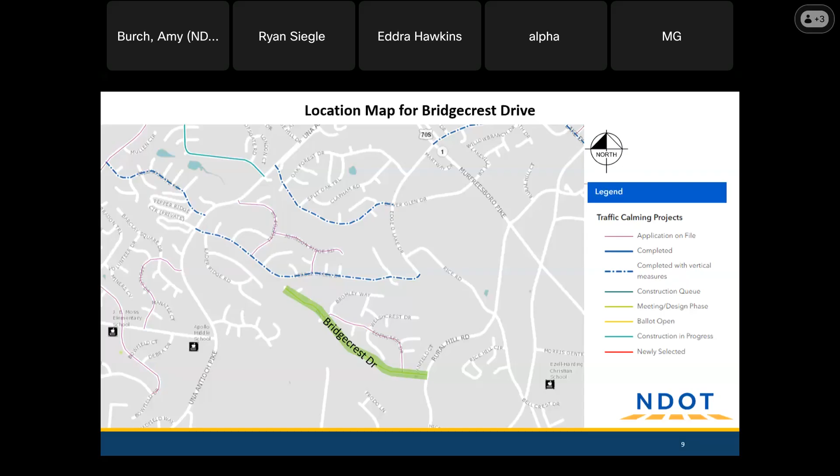Okay, so now I'm going to talk briefly about some of the tools in our toolkit. Speed cushions are our primary tool that we use, for a number of reasons, but they're very effective. People like them, they're easy to install. And for those reasons, NDOT really likes to use these speed cushions.

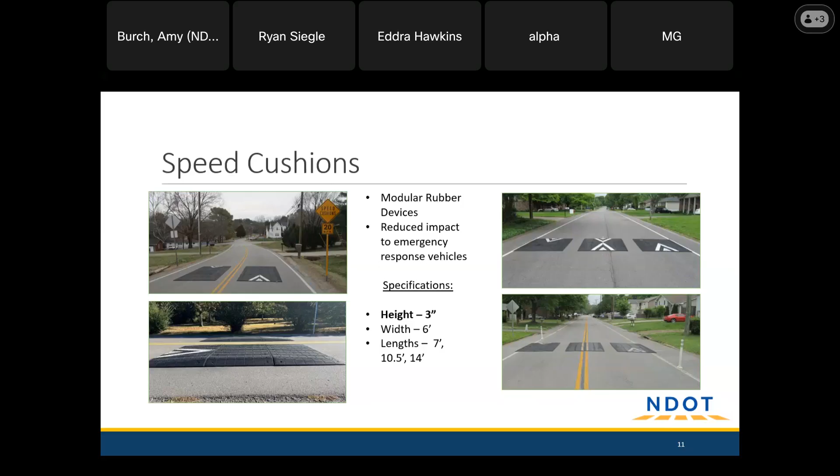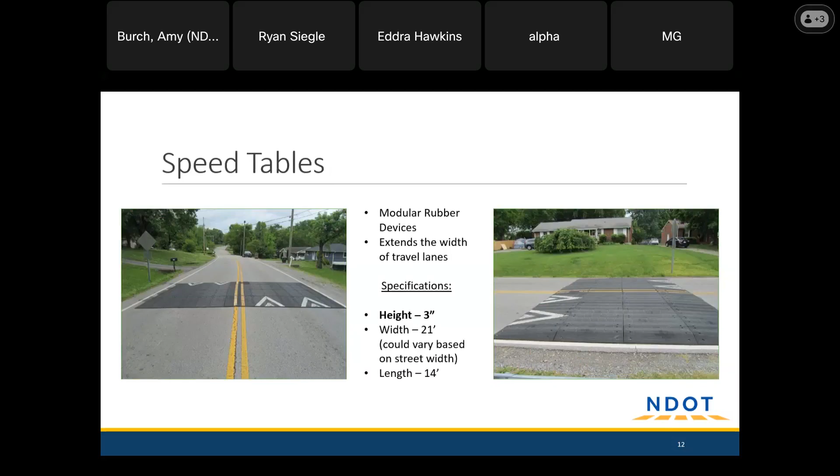Speed tables are another vertical device. They're made of the same rubberized modular material, but the difference is they don't have the gaps for larger emergency vehicles to straddle - they go all the way across the street, and they're kind of flat on top in the middle. Otherwise, the way you drive over them and their effectiveness is very similar.

We want to show some data points that NDOT has collected for before and after these measures being installed. The graph on the left is the average speed comparison - before, on the far left, it was 31 miles per hour on a street before the install, and the after average speed went down to 22 miles per hour. We measure this data between sets of cushions, so we're not talking about right at the cushion, but trying to make sure we're getting consistent speed along the street.

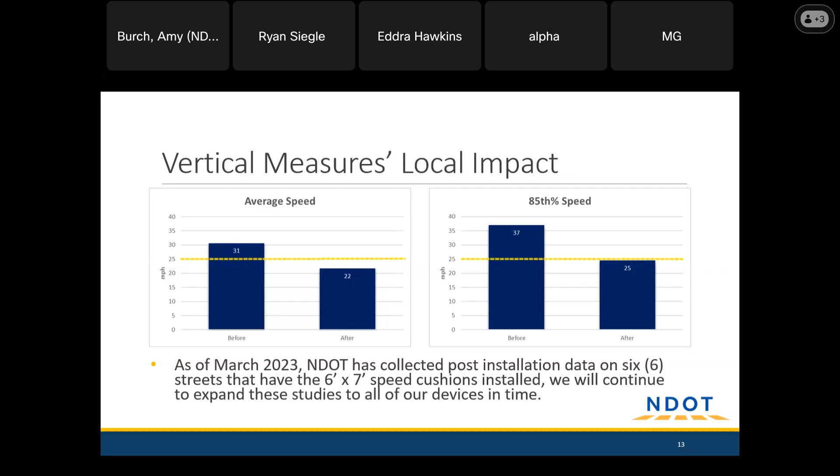The 85th percentile speed is the graph on your right, and that says the 85th percentile speed was 37 miles per hour before the speed cushions were installed, and it went down to 25 miles per hour after installation. So we're seeing it's pretty effective, reaching that target speed of 25 miles per hour, which is the posted speed limit. This is a study of 6 different streets we did a before and after study on, to make sure we were headed down the right track as we continue to install these on residential streets.

Another tool in our toolbox, you've probably seen these on streets around your neighborhood - the radar feedback signs. They are typically posted with speed limit signs, but will show your speed as you're approaching.

We also find these are effective, with the average speed reduction in our before-after study going down 6 miles per hour, and the 85th percentile speed going down 7 miles per hour. But these aren't installed in the road or anything, so it's more of a reminder for drivers, showing them their speed, because we sometimes don't pay attention to our speedometer as we're driving.

You had a question, sir? I had those posted on Bridgecrest last month, I think. On here, it says it collects the data, but online it said it did not. Did you have the speed trailer installed? Yes. So the speed trailer does not collect the data?

These do, and they can, that's how we're able to get some of this before-after data. It's a reminder to drivers, and those drivers that are conscientious really do pay attention to that and slow down some.

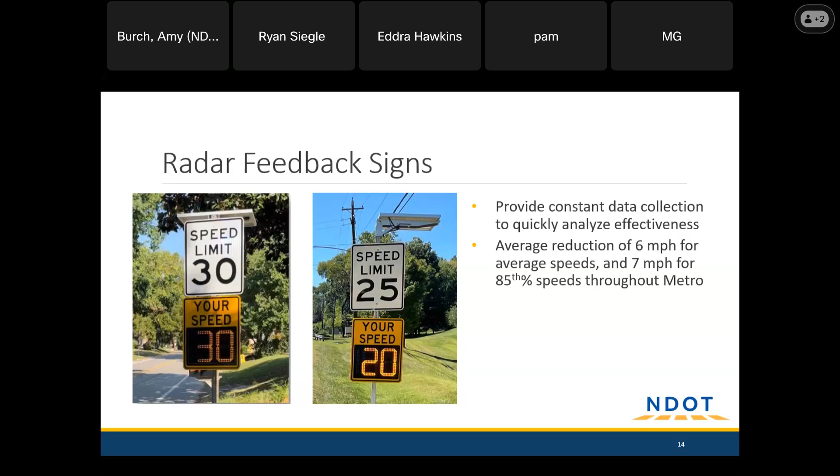Alright, moving on to some of our other tools that are not so physical in the roadway: pavement markings, lane narrowings, things like that. When we have a wide street that doesn't have curb, gutter, and all that, we can narrow the roadway. It gives a visual narrowness, and drivers can slow down a little bit with that.

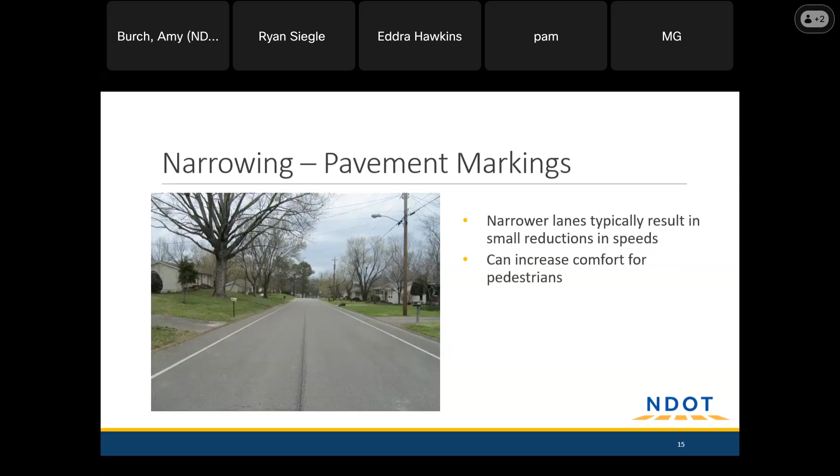At intersections we sometimes incorporate bulb-outs, using paint and white flexible delineator posts about hip height to narrow the intersection. This achieves slower turning movements through the intersection, and it narrows the crossing distance for pedestrians. So the one on the left is just a really wide intersection with huge radii, and we want to tighten that intersection and make drivers feel more constrained and make slower turning movements.

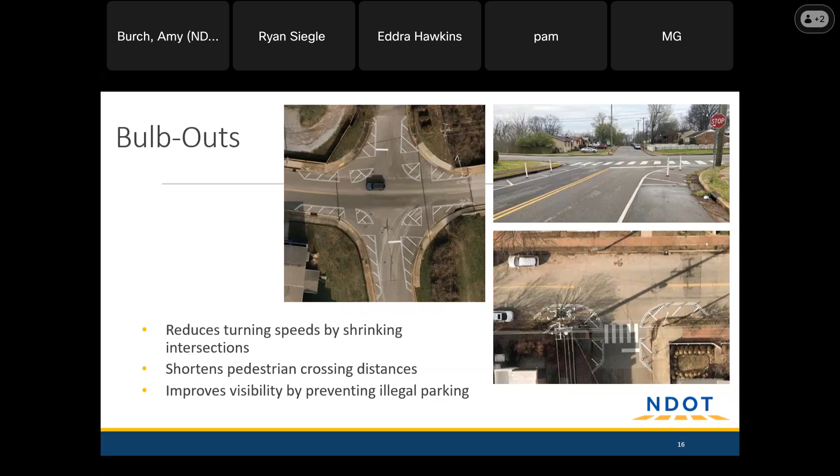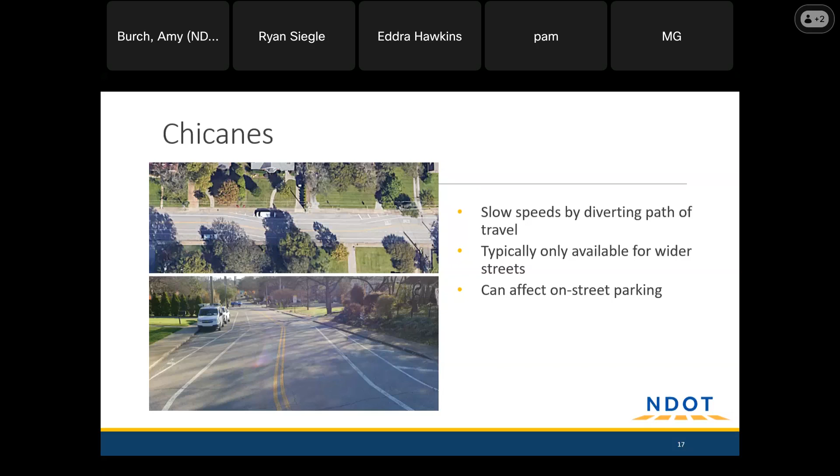Typically the traffic control, like stop signs, doesn't change with an installation like this. So the side street would still have a stop sign, and they'd yield to cars coming and going on Bridgecrest, but the Bridgecrest traffic would slow down to go around that circle.

Somewhat near here, locations where these are installed are in South Nashville, I think Keeley Drive and West Ridge, is that right? And East Ridge. You're familiar with those streets? I think that's where we have some installed.

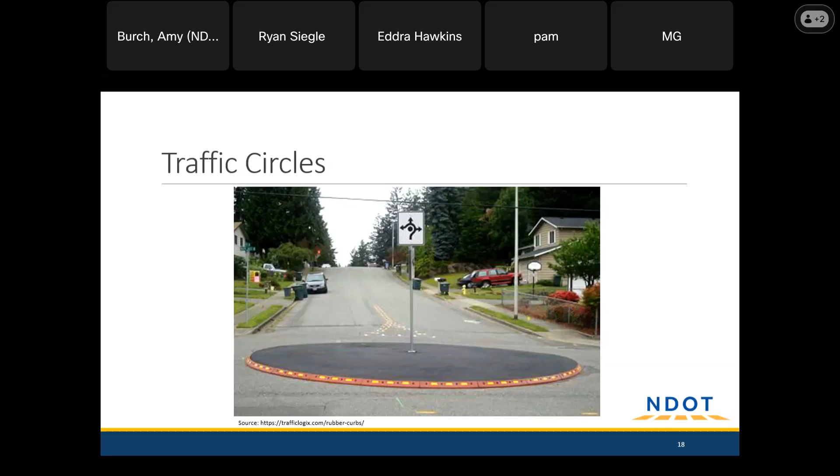There was another person in the chat interested in the traffic circles. Someone else on the chat was also expressing some interest in the traffic circle. So let's address any questions about our toolbox, but we want to keep going on our plan.

The reason I wanted to put something at this intersection is because otherwise we have some steep grade coming down off of Rural Hill Road, and we have limitations on where we can put speed cushions. You can't put them on grade that's as steep as this.

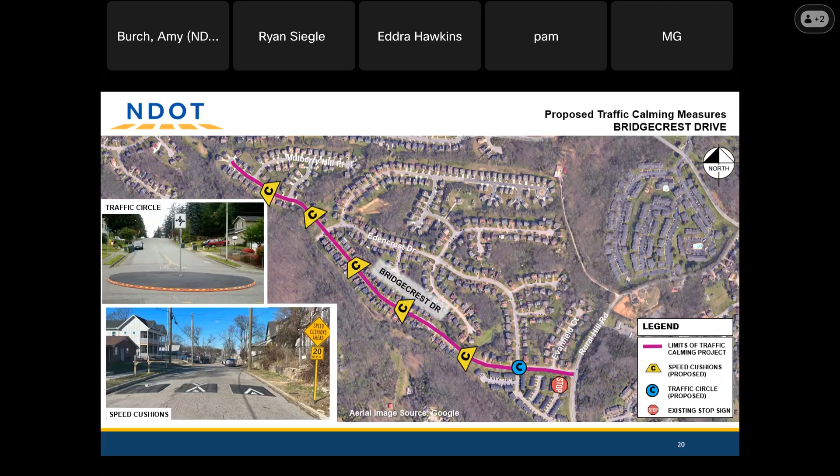So let's move on to our program flow chart. Give you some history about how we got selected, where we are now.

We present our concepts so we can get some feedback from you all. From here, we would go into our more detailed design, field measurements, width of the streets, and exact locations of the speed cushions.

We put that on the plan, like 50 feet from this driveway and so forth. So once that detailed plan is put together, you as a community can review that and see what that says, so you can have an informed decision about what our next step is, which is a vote on the project.

So if during this meeting we think we need to have another meeting, you want to see the more detailed design plan, how we incorporated your comments, we can certainly do that. If we want to just keep this moving, and we all feel comfortable where we are and our understanding of what the design would look like, we can bypass that second meeting.

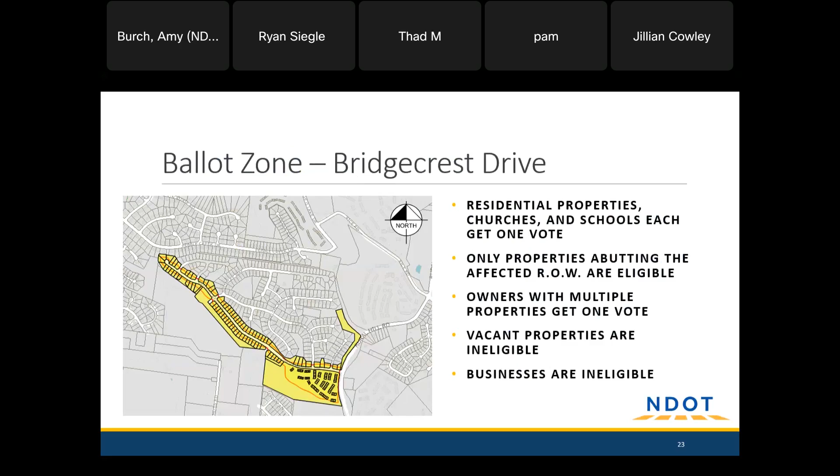So you'll know when you get it - go ahead and vote right away. If you put it to the side, you may lose it. I like to encourage people to vote right away and remind your neighbors to look for their postcard and vote. This is the best way we know to reach everyone is through the mail. We really want everyone to know about the project and have the opportunity to vote for the project, or no, if that's the case.

Also on these postcards there's contact information. So if anyone receives it and is unable to vote online for whatever reason, there's a phone number that can reach NDOT to get help with that. You may have to leave a voicemail and get a call back, but someone can help guide you through that process. And if you receive your postcard and your neighbor didn't, I gave you my contact information.

Please let me know or let your council member know, and we'll get that. Mail sometimes may not make it there, but we think they do, and they may get lost in your junk mail or something. So just be on the lookout for them.

So I'm going to go back to our program flow chart because I talked about this optional second meeting, and do we think we need to do that, or do we want to move forward with this concept plan?

And I'm seeing council member - she likes it, she thinks she likes the plan, but it'd be nice to see the actual design. I did reach out to several of the other folks in the community as well as the townhomes to let them know about this, but because this will definitely impact them, I think after seeing this information we need to do another reach out so we can have a second meeting and people see what's really going on with it. I'd love to have a second meeting.